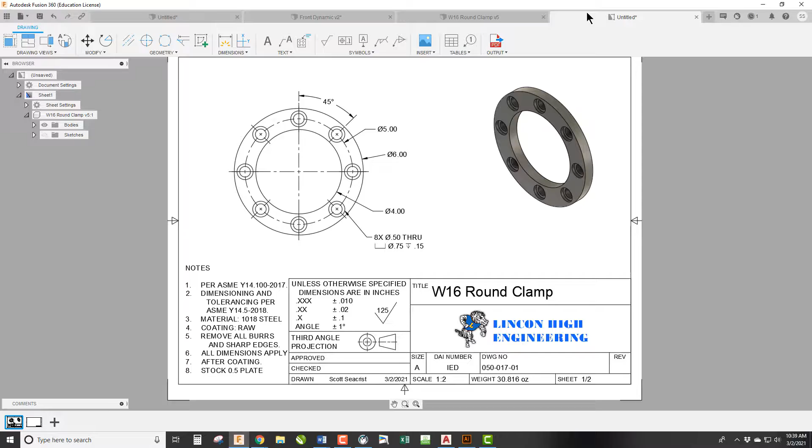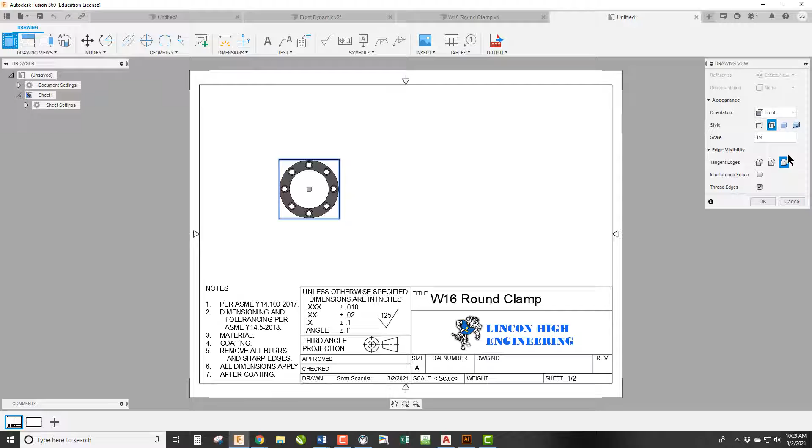Okay, let's get into it. So we're going to create a technical drawing of this flange plate, designed from drawing. We're going to go to template, and we're going to choose the 11 by 8.5, which is a landscape template on 8.5 by 11 sheet. We're going to click OK. And we're going to go ahead and place the first view. I think we can get away with a 1-to-2 because part of the thing today is we're going to talk

about that. Now let's talk about setting up the title block and the notes, and then we'll get into the dimensions. So first thing, let's do the notes. This is going to be 1018 steel. Remember, the tighter the specification on the material, the more money it's always going to cost. The coating is raw. It'll be welded onto a piece of pipe.

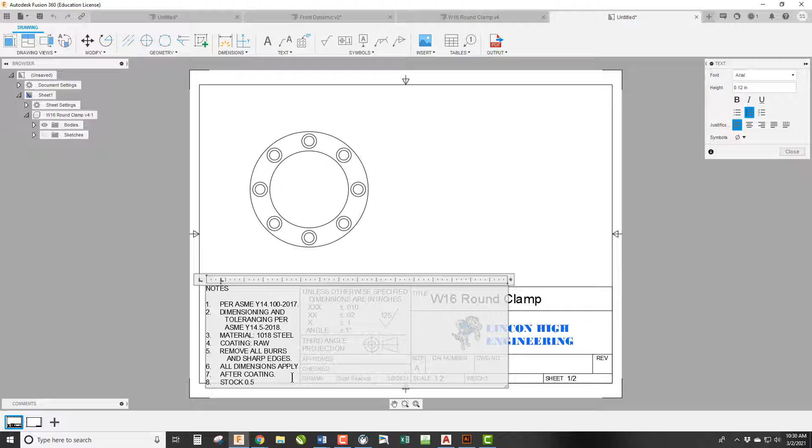And then we are going to actually add a note to the bottom of this, which is going to say stock 0.5 plate. Now, by doing that, we can get away from having to do a right side or top dimension. If it's just a flat plate, this is normally acceptable. Remember, the goal of a technical drawing is to fully convey what this project is to a manufacturer and how

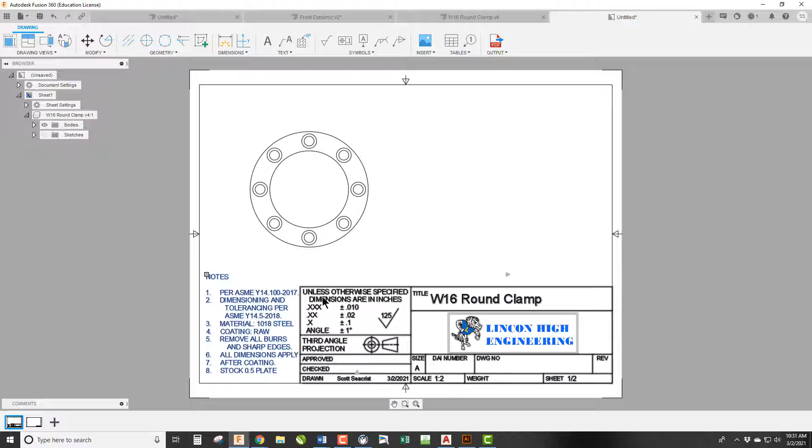to make it. If I do a right side view, which I can show by just doing a project, and then we'll do the isometric while we're at it, and click OK. And we're going to turn the isometric into color, and we are going to turn off on this one hidden lines, which all we end up with is a rectangle. And the only dimension we put over here is a 0.5. It's the only thing useful.

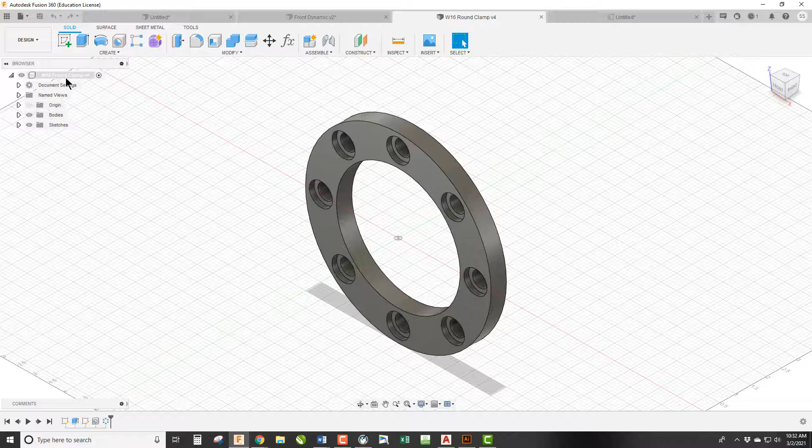So I can avoid this, ease up the reading of the drawing by adding stock is 0.5 plate, which basically says, hey, it's just a flat piece of material. We don't have any profiles. So I'm going to go ahead and delete it. So now I'm back in the model. If I go to physical properties, I can then select metal, and I should be able to find 1018 steel. So we're in stainless steel.

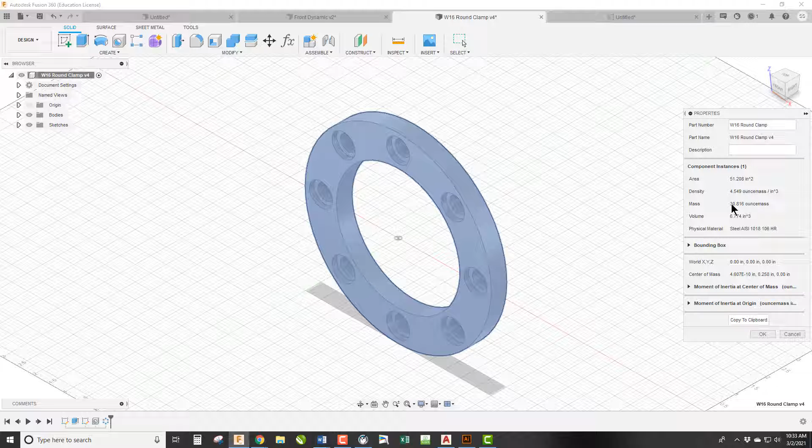So 1018, there's a few different variants of it. I don't think they just have a straight version. So we'll use 1018 106HR. I just care that it's a 1018 steel. I don't actually care which one it is, but we need that to get the weight. And then we can go over here and go to properties, and here is our mass, which is 30.816 ounces.

Okay, so let's go ahead and finish up the title block, and we're going to double click on it. There we go. IED is the class. The drawing number is 050 for my Fusion Mondays assignments. This is week 17, and this is the first one of week 17. This is being recorded in 2021, and it's the first version of it.

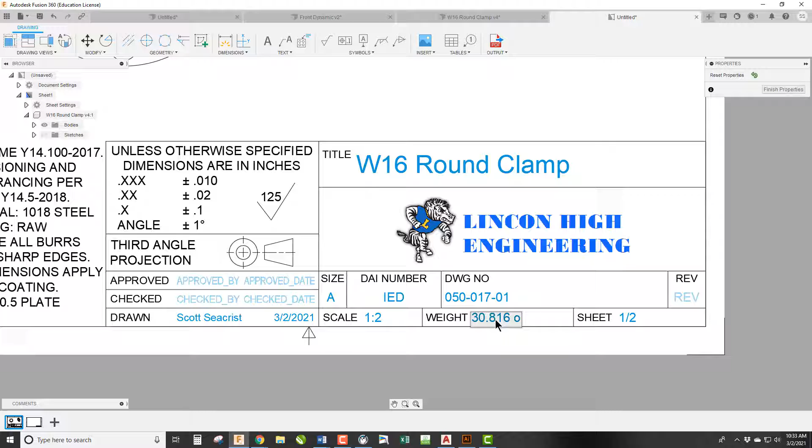And we could type in 30.816 OZ for ounces so that we get all the drawing done. Oops. I forgot to hit enter. 30.816 OZ, enter. There we go. Finish property. Now we have the drawing title block done. We have all our notes, including specifying the thickness. So now we need to dimension this.

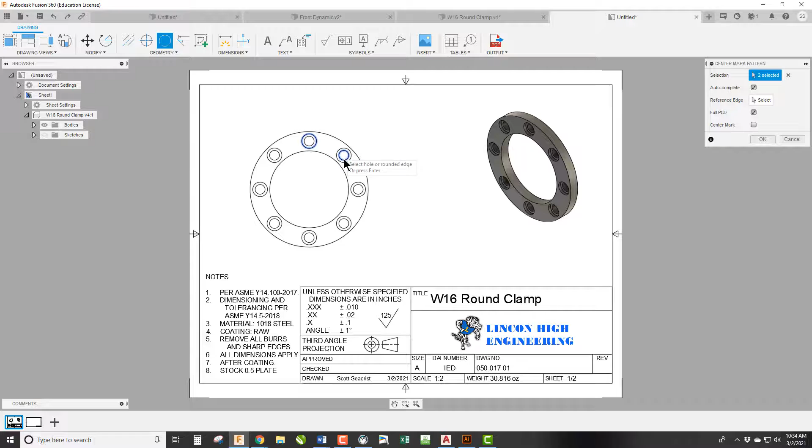So I always start with our center marks. We need to do a center mark pattern because this is a circular pattern of holes. So we're going to hit center mark. We are going to click on each circle, which should give us the full pattern. And we can click OK. We need to do a center mark of the entire part. So now we have our center marks on, and we just have a handful of dimensions to do.

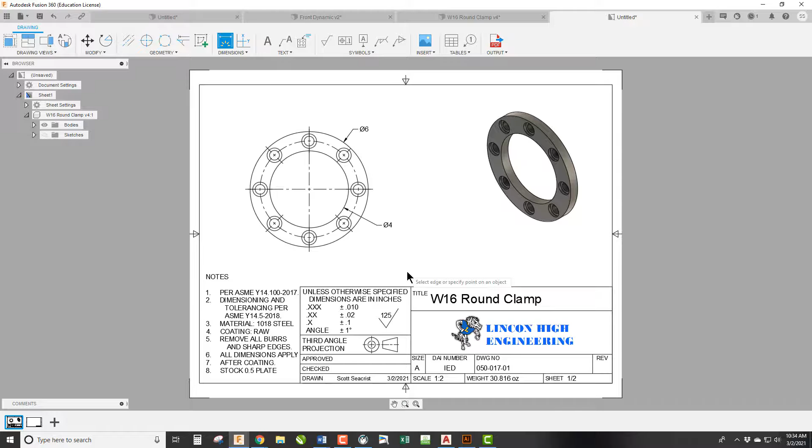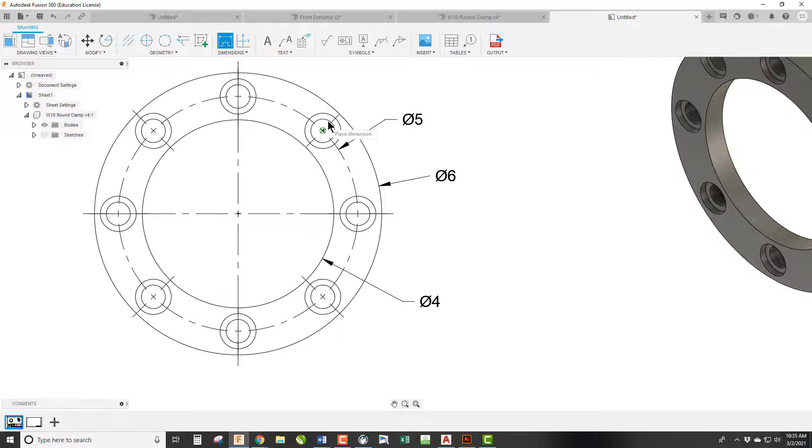So the first dimension is what is the outside diameter. It's 6 inches. What is the inside diameter? It's 4 inches. The center of all of the bolt pattern is on a 5-inch diameter. Now, next I actually am going to move this 6 to over here because I need to put an angle between this line and, where was it? That line. And we can do 45.

Now, because we have a circular center mark and we're giving the angle, the manufacturer understands that that angle applies to each one of those. Each one is 45 degrees apart from the other one. Now, we're going to use the hole thread command because these were created with the hole command over on the model side. So we're going to click on this and we can then just drag this out and it's going to give us all the relevant data for this bolt pattern.

So the only thing here that we have to worry about is precision. We want a little bit higher precision than the 0.1 that a single decimal point gives us. So the only way to really give us that higher precision is to override it by typing in the trailing numbers that we want. And by doing this, we have now specified a precision of plus or minus 0.02 or 20 thousandths versus, well, I actually didn't even give a tolerance because I didn't have a decimal point at all. So this makes it much clearer.

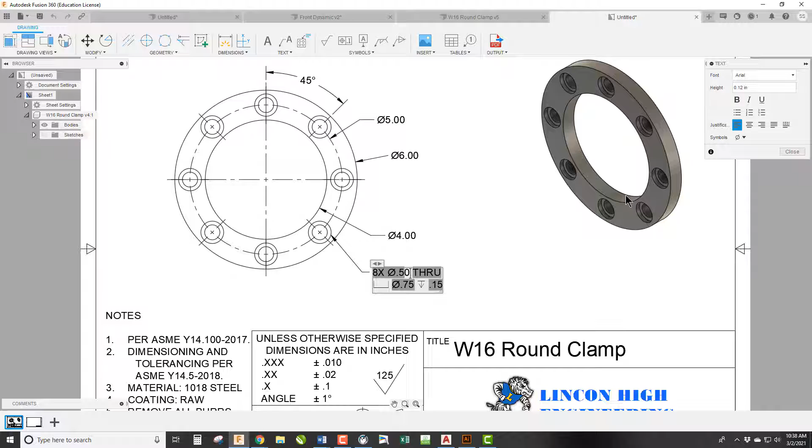The manufacturer would have interpreted the 4 as the highest tolerance of plus or minus a tenth, which is a huge tolerance. So now we've tightened up the tolerances quite a bit. We can also go down here and add a 0 behind that 5 if we wanted to hold a tighter tolerance of plus or minus 20 thousandths. And also that would give us a uniform value across all of this drawing. So we're now done. We have a fully complete drawing. We're ready to hit print or send it out for manufacturing.